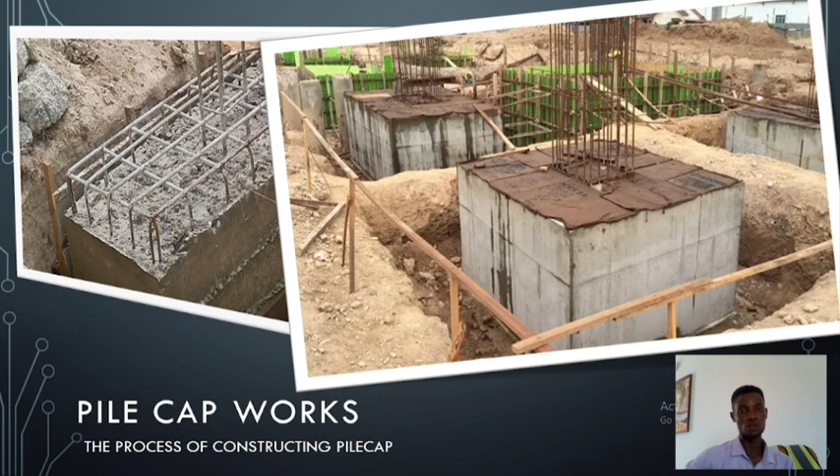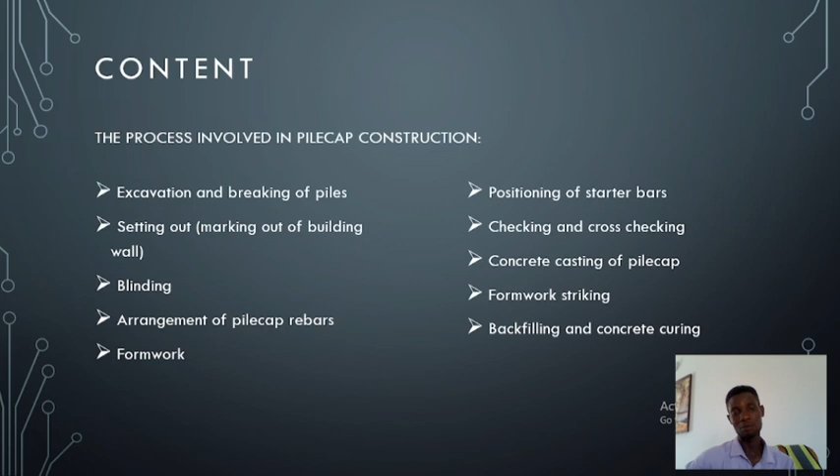So the content of this video involves excavation and breaking of pile, setting out, that is marking out of the building wall, blinding, arrangement of pile cap rebars, formwork, positioning of starter bars, checking and cross-checking, concrete casting of pile cap, formwork striking, backfilling, and concrete curing. So I'm going to take you through all this process. And these are the processes that a pile cap construction entails. So I'm going to take you through this process, and I'm going to be giving you a practical explanation on it.

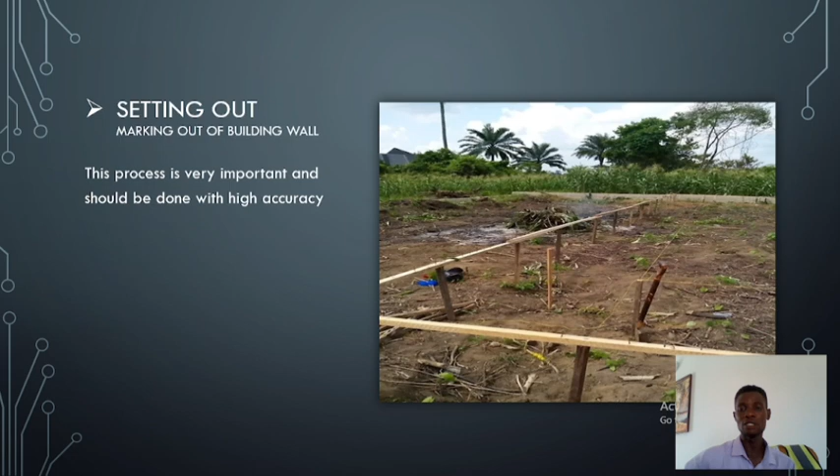So let's begin. So the first thing is the setting out, and the setting out starts after constructing the pile. So after the pile has been done, the first thing we do is the setting out. That is from the drawing, the marks are already in it, just like the normal setting out where you set out the wall of a building, where you can excavate and begin to do your blinding and your normal work. So in pile also, it involves setting out where you set out your points, know where your column starter and your wall is going to start from and where it's going to end.

So just like the drawing you are seeing here, you are going to take a look at the drawing and you offset everything on this profile board there. So that is setting out and marking out of building wall. So you mark all this out, and this is one of the crucial jobs in every construction process. Setting out is one of the first works we do after site clearing, but in this process after the pile, setting out is one of the things you also do that you don't neglect.

And if you are doing setting out, one thing you must know: if your dimension is 1550, most of the time some people will neglect the 50 behind the number. They will just take 1500. And when you have 1505, some people will neglect the 05 and use 15. Now if you are doing this, it means you are either shortening the length of the building or you are increasing the length of the building. Increasing means if you have 1505, you might say, okay, let me take 1510. No, you must be precise in your measurement if you are using the local method to do your setting out. Some people use a total station, which makes it easier for them to do setting out. So whenever you are doing setting out, make sure that you are precise with the distance.

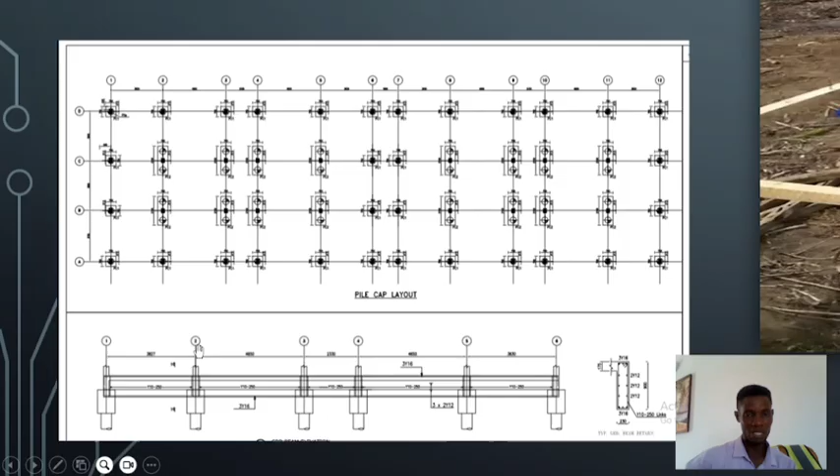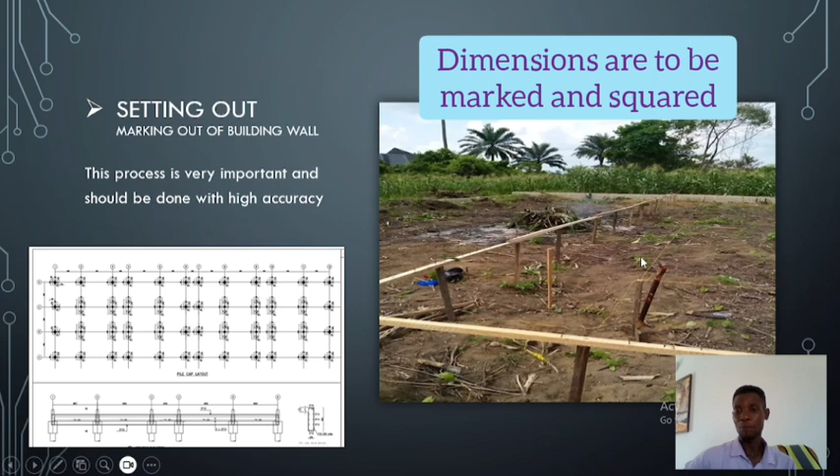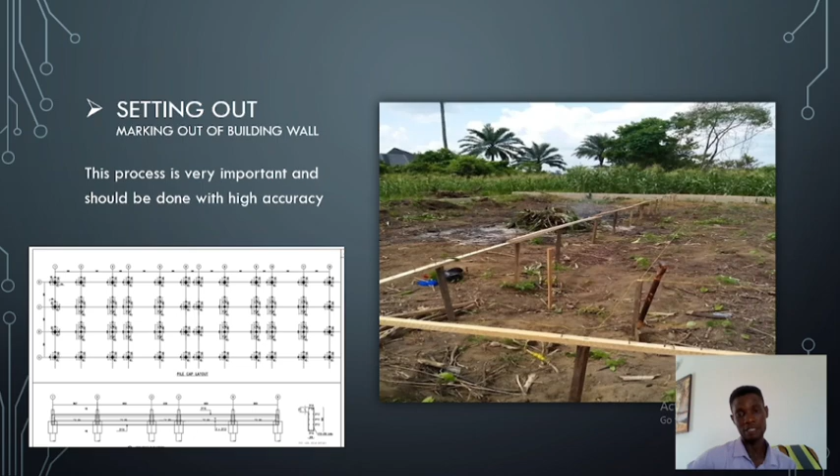Now if I zoom this down, you might not see it, but let me try doing it. Okay, there are some dimensions here, you can't see them because they are small. So you must be precise in the dimensions on the setting out. So you just mark it around. Your building wall is going to be marked out during your setting out. So that is what the setting out entails, and it is one of the jobs that you must do with cautiousness and care, not marking out the wrong point. So setting out is very crucial in every construction work, especially also in pile cap. It is very important. Now the next thing we do is the excavation.

Now, excavation involves digging the area where you need to do your pile cap. You dig to allow for blinding and your pile cap. Most of the time when we do excavation, people just excavate. You don't excavate just the size. Let me assume in your drawing you have your pile cap to be 750 by 750. Now, if you are digging, you don't dig 750. You understand? You don't dig 750.

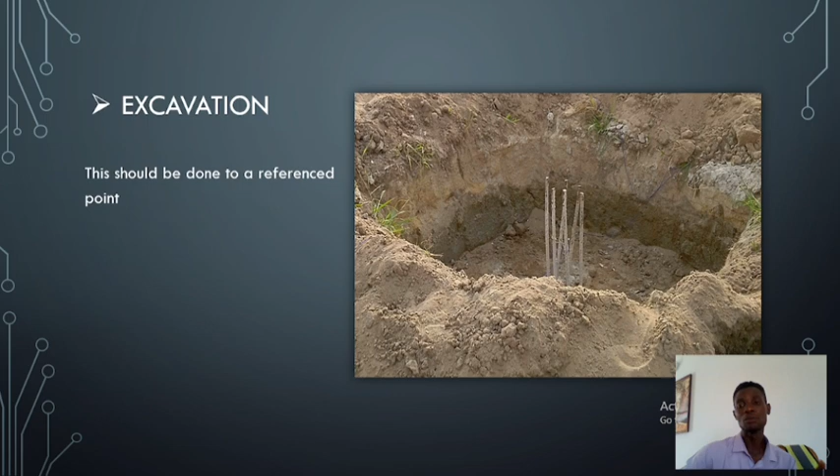You dig and leave allowance for the formwork and for the laborers or workers that are going to work around the pile cap. So you leave a space of probably 300 to 500 as allowance for them to be able to work. Look at the picture here. These are the piles. This is four piles. Now you want to do a single pile cap on this one. So there will be a space left out here, so they will be able to work on it.

In excavation, I call it excavation and breaking. If you check the content of this video, excavation and breaking. Now, how do you know what you are supposed to break in a pile cap? How do you know that you are supposed to break to a particular line? Because we don't just break. Those people that do piles will cast to the natural ground level that they met on the site. That's what they are going to do.

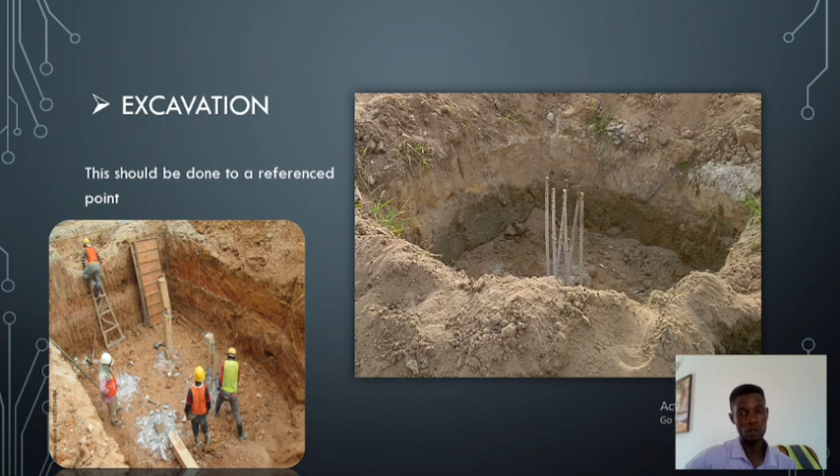They are going to cast your pile and they will take their zero level from the natural ground level, except if you have a benchmark on the site. Even if you have a benchmark, they are going to use the natural ground level as their point zero and they will cast downward. Now, when you want to do your pile cap, how do you know where to excavate to and where to break to? From this sketch, I'm going to be explaining to what depth you are going to be breaking. This is just a sketch that I just drew out now.

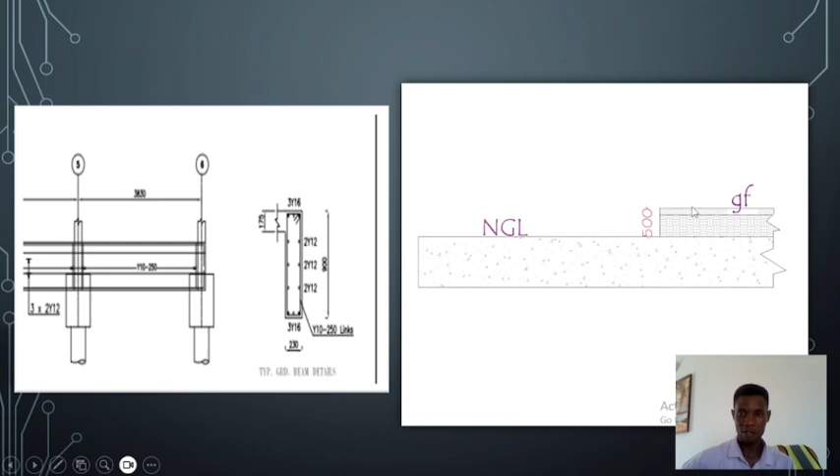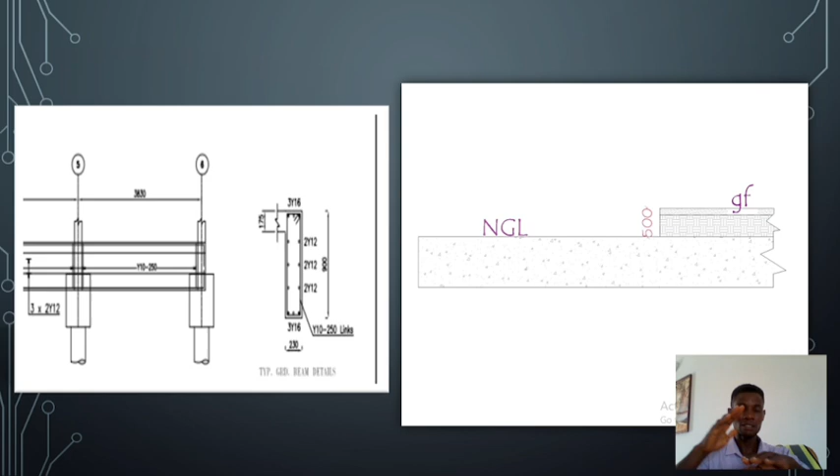From this sketch, this is the natural ground level, and GF is the ground floor. So this drawing is telling us that the ground floor, that is the DPC of the ground floor, is 500 higher than the natural ground level. Let's say you get to a site, and you are being told from the architectural drawing, because you won't get this in the structural drawing, that this is your natural ground level or your road level, and this is your building. Your building is 500 higher than the natural ground level.

Then you go to your drawing. From this drawing, my beam is 900. Let me zoom in so you can see. My beam is 900 and my pile cap, let's assume, is 1 meter. Just like the normal process, if this is 900, then the beam is going to be embedded in the pile cap by 200. So when you are casting this, you cast to the point where you leave 200 at the top, then you insert the beam at that point.

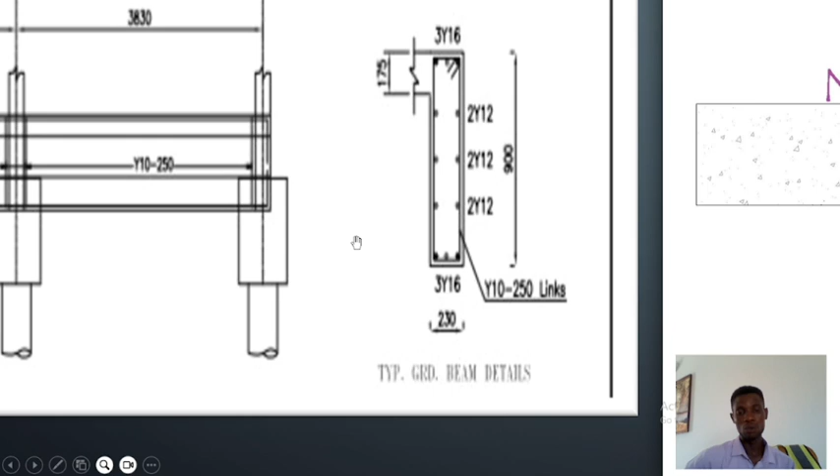So if this is 900 and I know 200 will be here, it means the remaining length here is 700, and this is 1 meter, meaning it is 1.7 from the bottom of the pile cap to the top of the beam. Yes, this is going to be the same level as that of the slab. This is the top of the pile cap. So what do I need to do from here? I want to know the depth to which I'm going to dig, and I know that from the bottom of my pile cap to the top of my beam is 1.7 from this drawing.

1.7. So what do I do? I know that this top here is going to be flush with this top here, and I have 1.7. Now 1.7 minus 500, this is the natural ground level. This is where the pile is currently.

So 1.7 minus 500, I'm going to have 1.2. It means I'm going to excavate and break for the next 1.2 meter. So I dig to that, and that will be the bottom of my pile cap and the top of my pile. If you watch this video again and repeat it, you are going to understand what I just explained. I got it from here.

This is 1.7 minus 500. This can be any dimension; I'm just using this as an instance. Now you're going to dig 1.2 meter. When you dig 1.2 meter and you construct your pile cap from 1.2, you are going to have 200 left, and you know that your beam is going to be in here by 200. Now remaining 700. Now 200 plus 700, you are going to have your value.

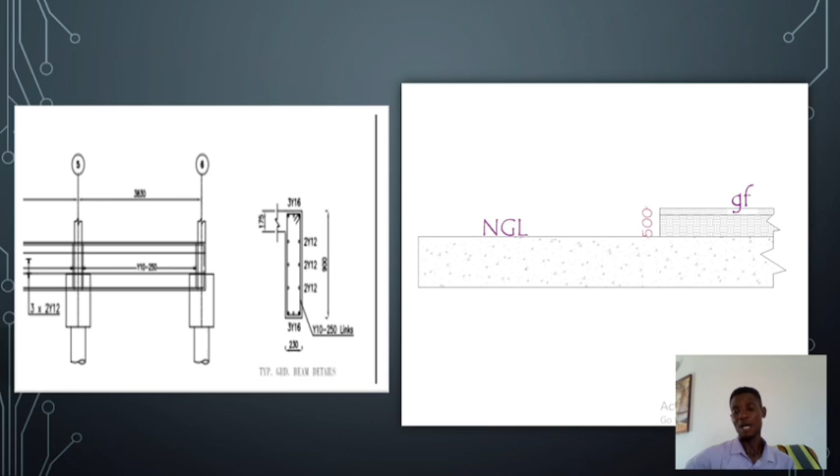So that's how to know to what depth you are going to break your pile and excavate. That's the depth you are going to excavate them. The excess reinforcement, you can just trim them off and let them remain like 500 mm upward from the pile. You are going to have your remaining iron with 500 mm. So that's how to know to what depth you are going to excavate and break.

And all these things I just explained, you are going to get the level with the leveling instrument. Probably you have a benchmark. So I just assume this is going to be the benchmark, the natural ground level. You might have any level from the architectural drawing that this is the level you must use. I'm just teaching you how to know where you are going to excavate to. So this might be 1 meter.

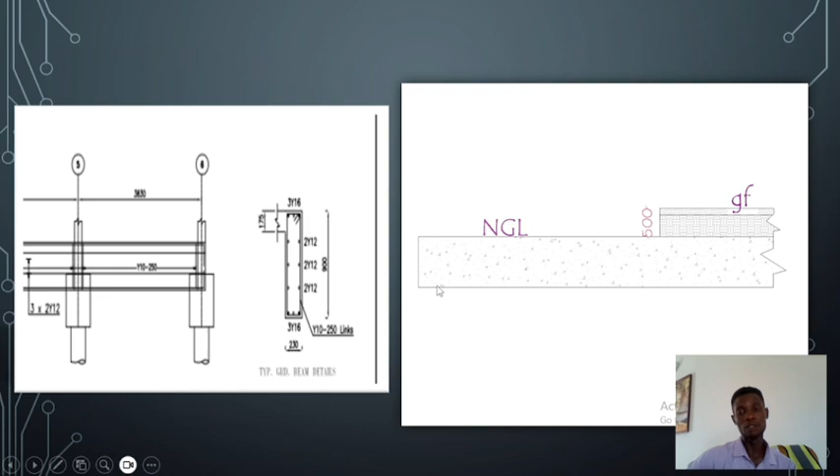You might be told that your DPC is 1 meter higher than the road level. And you know this is 1.7. So 1.7 minus 1 meter, you're going to have 700. It means you are going to just excavate for 700, do your pile cap and your beam. Then you are going to have up to 1 meter. And sometimes the reason why we bury our pile cap in the ground is to avoid it being seen after the construction. So that's the process of excavation and breaking.

So the next process is blinding after excavation. Look at this that has been excavated according to the level. So you do your blinding. Now the essence of this blinding is to prevent the reinforcement from touching the ground, from starting from the ground, because the normal way we do it, reinforcement does not touch the ground, it does not start from the ground. So you have to do your blinding where reinforcement is going to sit on.

The blinding is not a structural member that you must pay much attention to, but there must be blinding on the floor, probably 50 mm. That's the attention you must pay to it. When you are doing anything in the foundation level, your cover is always 50 mm, and the blinding is going to provide a cover to this reinforcement. So you must provide a cover of 50 mm.

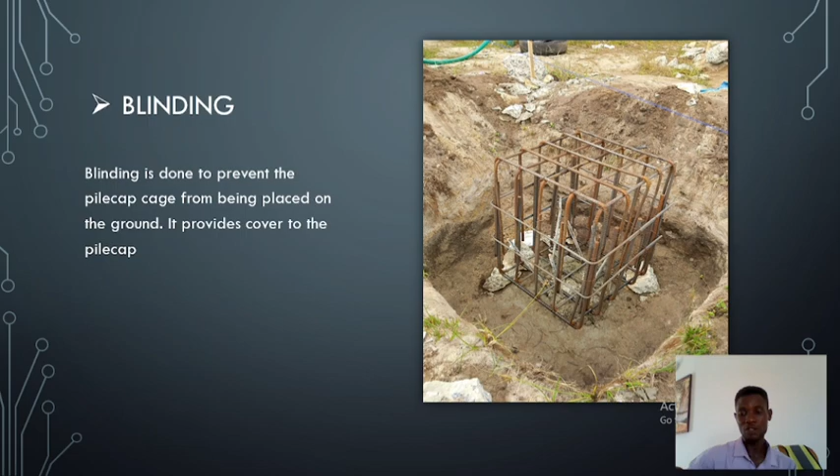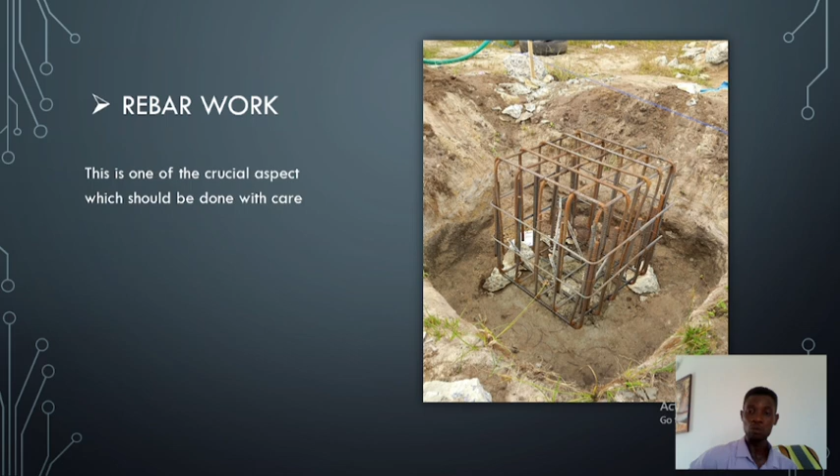That is the blinding. And the rebar work is a very crucial aspect in this job; we pay much attention to the rebar work and the casting. They are very crucial, because we are dealing with reinforced concrete. So the major element here is the rebar work and concrete. This is a crucial aspect you must pay attention to, and everything you are going to be doing will be from the structural drawing. You are going to pay much attention to the structural drawing.

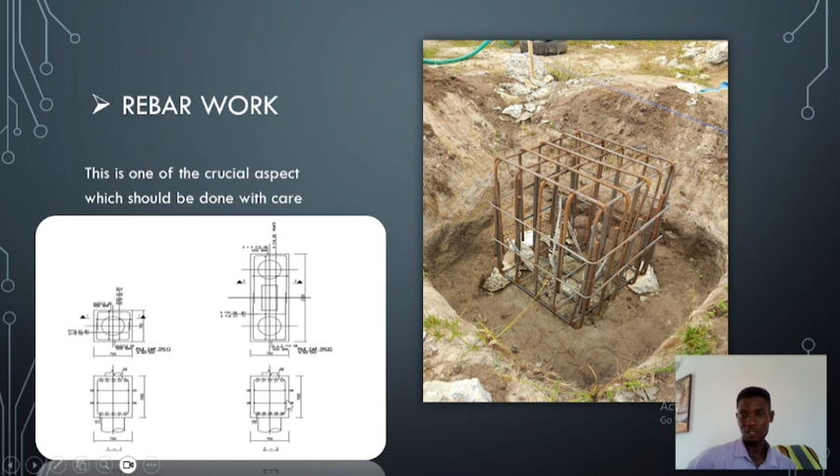Now this is the structural drawing, and this is what we have after doing this. This is the plan and this is the section. This is another plan for the bigger pile, and this is the section, and this one. So let me show you more video on it. This is when it was being constructed, and I'm going to show you how it is being constructed from the drawing and how to read the drawing,

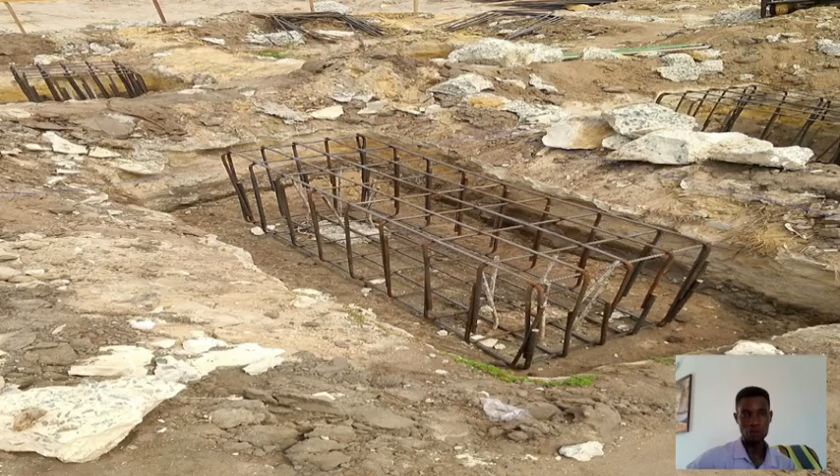the rebar drawing. And this is it when it was being formed. This is it. And let me show you how to see this drawing. This is the drawing I'll be using, because this is the one for the bigger one. Let me have it like this.

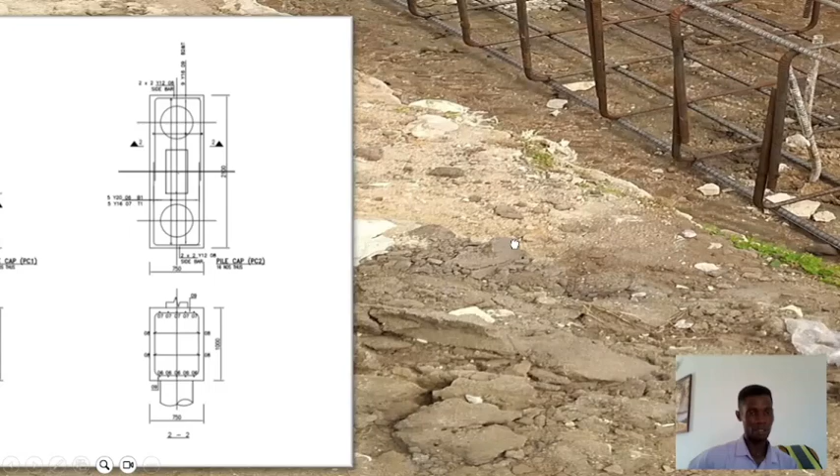Let me have it like this. Now, let's pay attention to this one. This is a section showing the depth of the pile. Now, a pile cap like that. Now, this is the depth. Now, this is the plan. The section is when you are looking from the side, and the plan is when you are looking from the top. Now, when you are looking from the top, look at what I have here.

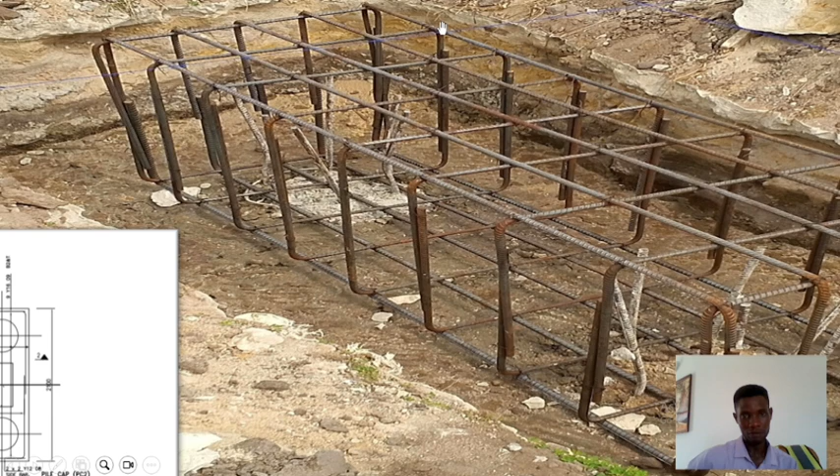I have a straight bar here. You can see it. I have a straight bar here, and I have a dot. The dot is showing me the description of this bar. Now this bar is towards the long length, right? So it's telling me that I must have 5Y20 and 5Y16 at the longer section. Now, if you look at it here, at the longer section, I have 1, 2, 3, 4, 5. Now it's at the top and it's at the bottom. Can you see it? It's at the top, because that is what the drawing tells me to do. From here, it's at the top and at the bottom.

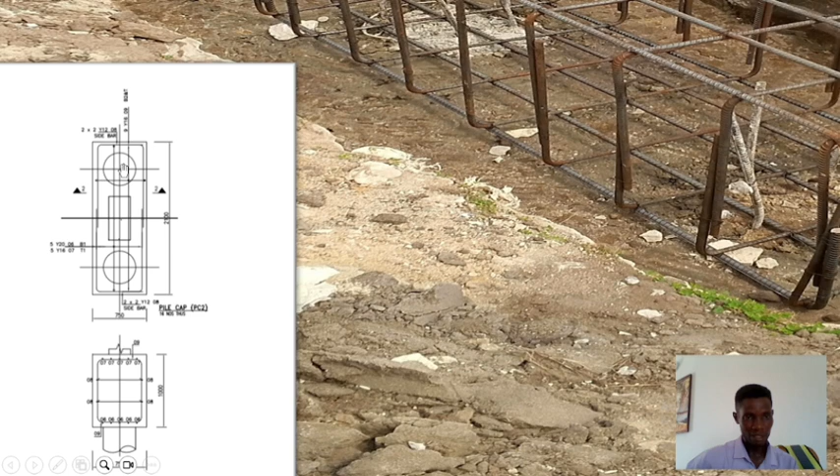Then I have another one that is distributing. They call that one B1 and T1. So I have another one that is distributing it. If you look at the drawing, you see this bar I'm touching. And the description says 9Y12 is going to cross this one I just arranged. So look at it. Well, let's count. 1, 2, 3, 4, 5, 6, 7, 8, 9. This is 9. 9Y12 is going to cross this. Look at it, it's crossing, and it has another one because it is at the bottom and at the top.

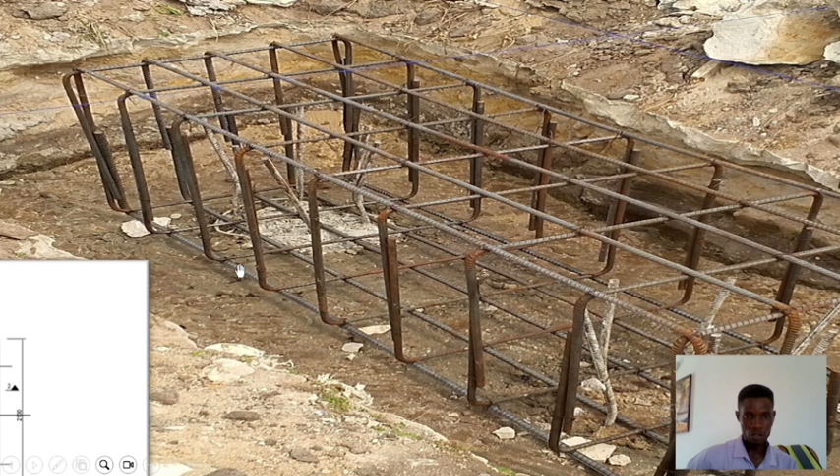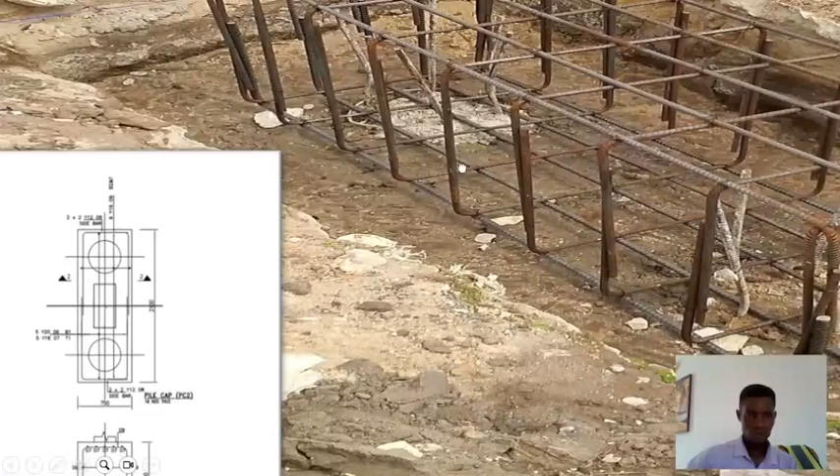These are the distribution bars and this one is the main bar. In this instance, they are the main, and these are the ones that are distributing it. You see, that's how it is being arranged. Then I have another one here, which is this U side bar. It is also called burst bar. And we have it to be 2 by 2 Y12. It is not here, it is in the next drawing after completing it. This is it. This is the burst bar.

We are saying it is a burst bar. And the function of the burst bar is to hold the two together. So in case there is excess load on this, this reinforcement will not be shifting, the cage will not burst. Now this is the pile cap reinforcement. It is arranged in form of a cage. And just like what I've said, you must pay a lot of attention to that.

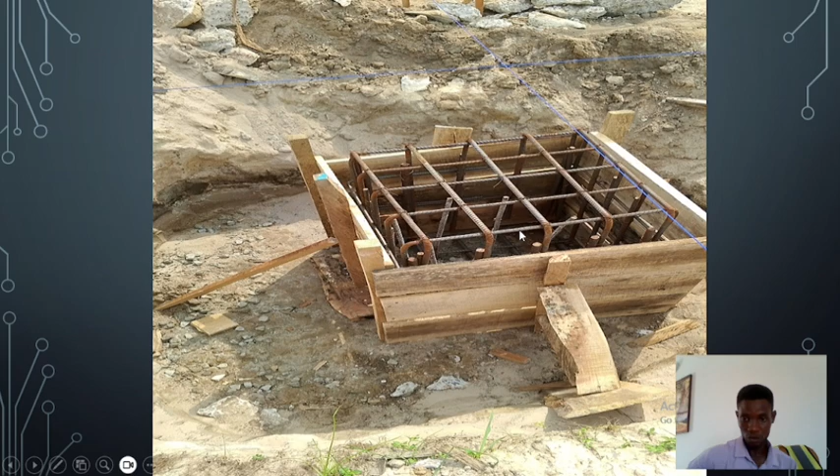Now, the next thing is the formwork. Formwork is any material that gives shape to the concrete, that you're going to have around the pile cap, to give the pile cap the shape you want to cast. So this is the complete work here. It was braced. You must make sure it is braced very well, so when you cast, it will not be shifting. The depth you are casting is about 800 mm, and the weight is very heavy and can move this wall backwards. So you brace it very well so that it will not be moving backwards. So that is the formwork.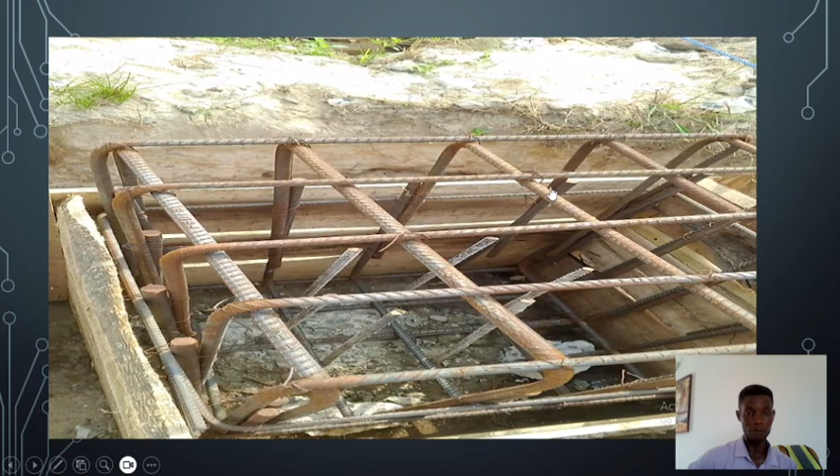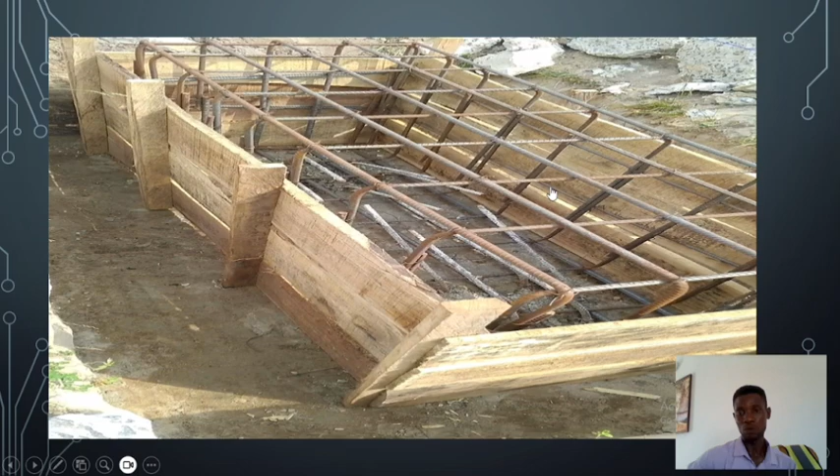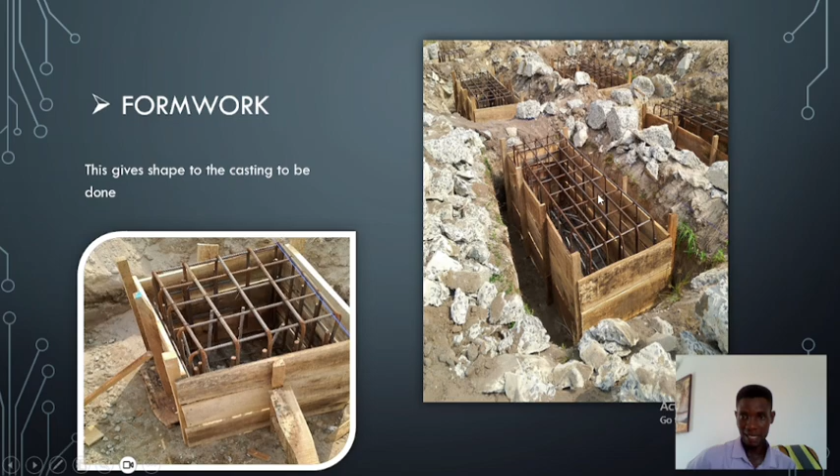The formwork, you can look at it from this video. So after arranging the reinforcement, the formwork. You see, while we are doing everything, the lines are still there. We didn't move the lines from the second stage. We did that so you're going to know where to place your pile cap and everything. You see the line is still there. So you make sure it is at the center line. Although some piles are going to shift.

So the next stage is positioning of your starter bar after your formwork. This is one of the crucial jobs in pile cap casting. So before you cast a pile cap, you must introduce the starter bar.

The starter bar is the bar for the column that you are going to lap the column reinforcement to. You must know the adequate length to cut, because if you cut the wrong length, it's going to be a problem after casting the beam, because it's going to be short at the top. So let me read this note here.

The length of the starter bar is determined from the drawing with the condition on site. Just like I said, the condition on site, if the site is asking you to go to a benchmark and you have a benchmark on site that you need to meet up with, and the condition from the drawing. So the length of the bar is given as the bend. This bend is always 300, 200, depending on the person that is doing it.

Let's say 300 plus the depth of the pile cap. It's starting from the bottom of the pile cap. This starter bar is starting from the bottom of the pile cap. So you have a bend which is 300 plus the depth of the pile cap, in this case 1 meter, plus depth of beam, in this case 900 minus 200, that is 700. So you have 300, 1 meter, 700, plus the lap length after the slab.

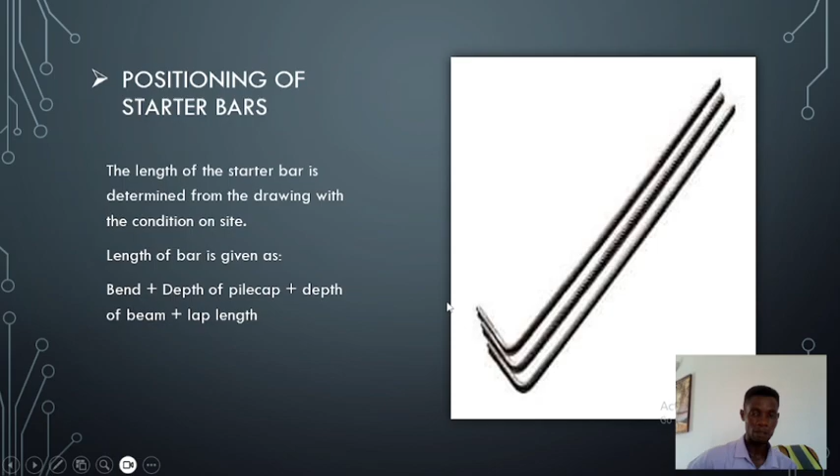That is how to do it. Now look at the starter bars. From mere looking at it, anybody that just comes here and looks at it would think this is too long. You understand? But we are doing the work, we know it is not too long. And if you can see, there is still a line there.

It is a line we use in positioning it. So you are going to use the line to position it. This is the center line. We pick it from the center line from the setting out. So this is the center line. We make sure it passes through the center of this pile.

And how do you know it passes through the center? This is from your drawing. You are going to know if it passed through the center. Now looking at this, this is the pile.

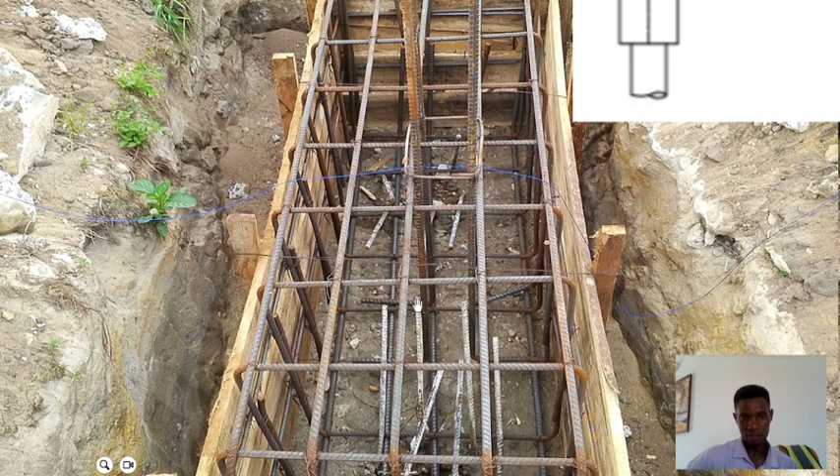This is the pile, so this is the placement. Just like I said, it's going to be 300 if you look at it now. Let me zoom in. If you are seeing the bend, look at the bend. This is 300, plus depth of this, 1 meter. So let's say 1 meter, we get to this top, plus the beam 700. We are going to have the remaining 1 meter.

So that's how to do the setting out. It is one crucial job that you must pay attention to.

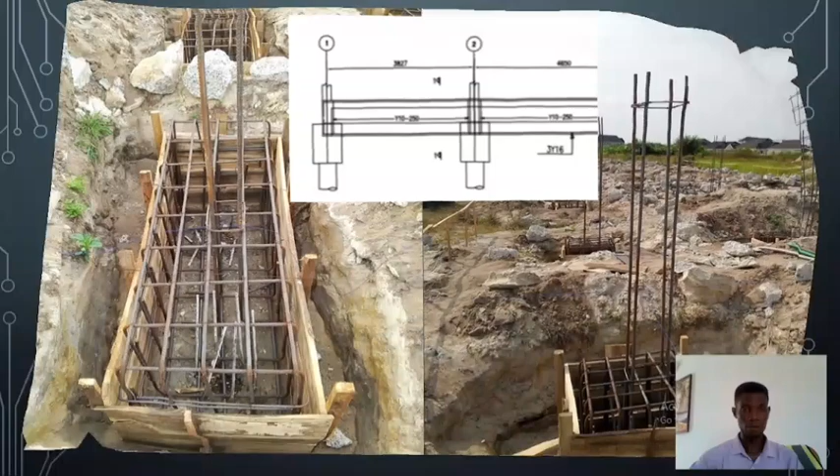So after that, the next thing is checking and verification, or checking and cross-checking. The reason why you check is to ensure there is no error in the work you have done. When you are doing that and you are uncertain whether what you are doing is wrong, always try to call your superior to come and check what you have done.

So the lap length must be observed. The type of reinforcement specified must be observed. The strength, the tensile strength of the reinforcement must be observed before you cast, because after casting you are going to embed all this in the casting. After casting, if you realize you have made a mistake, those mistakes, before you can recover them, it means you need to break the casting.

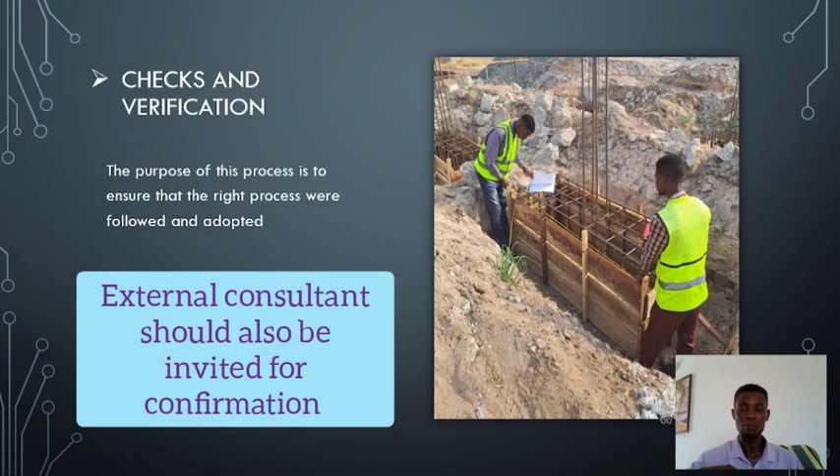Breaking the casting after you've used some amount of cement will not be economical. So you do checks to make sure everything is right: the positioning of the starter bar according to the drawing, the arrangement of your reinforcement, the size of your pile cap according to the drawing, and every other check you need to do. Then after that, you can now go to the next step, which is casting of the pile cap.

While doing this, you must ensure the mix from the drawing is being observed, the appropriate mix. Most of the time when we cast pile caps, the grade is always 25 newtons per millimeter square. That is the grade after 28 days. It's going to be 25 because it is foundation work.

Remember the Bible verse that says, if the foundation could be destroyed, what would the righteous do? So whenever you are doing work on the foundation, it is time to pay crucial attention, not a time to compromise. Because if you compromise, it is not really work. They say what is worth doing is worth doing well. If you think it is worth building a house, a 5-story building, then do it well, because if you don't, everything will crumble and turn to rubble, and that is a waste of a lot of money. Reinforcement in the market now is very expensive, even cement and every construction material is very expensive now. So it is time to pay crucial attention to whatsoever you are doing.

So I was talking about the mixing. You must make sure that the mixing is according to what you have in your drawing. You must not compromise in the mixing. The note I have is: ensure the right mixing proportion is used and that it's well vibrated.

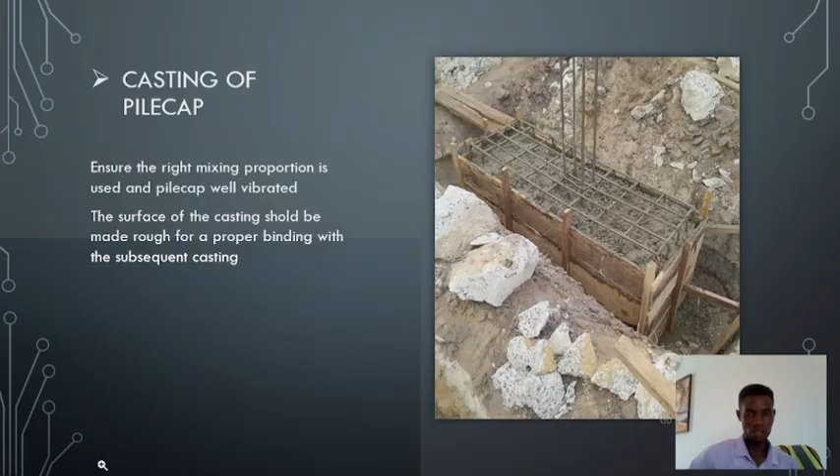The surface of the casting should be made rough for proper binding with the subsequent casting. You can see the surface is not smooth, it's not the kind of work that needs a bricklayer. It's left rough because your beam is going to anchor here, so you must leave this place open, and when you do your beam, you put a board around it and cast it.

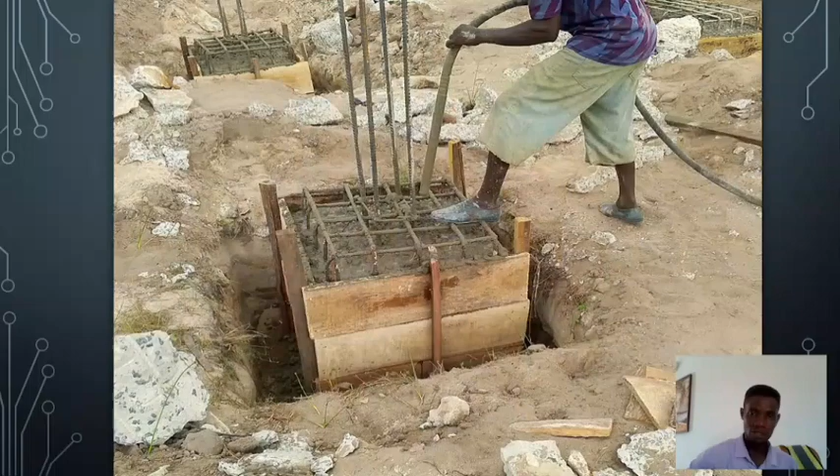So for the next casting to bind with this successfully, this area must be rough, and your casting should be well vibrated. Look at it, this is after the casting, this is the process of vibration. It must be well vibrated.

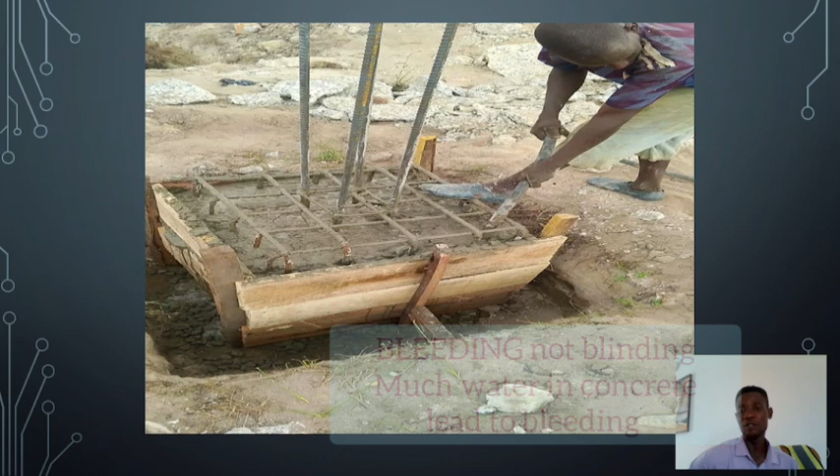Let me share a brief note on water content. Sometimes we have a water content of 0.3 or 0.35 in concrete, sometimes 0.45 and 0.55. The more water you use, the weaker the concrete, and sometimes if the water is more, it's going to cause bleeding. And if the water is too small, the workability is reduced.

One of the water percentages I advise people to use is 0.45. You can see during the process of vibrating that it's not that watery, look at the side of the formwork, it's not that watery. So the water content we use is 0.45.

Convert from kg to liter. Density is mass over volume. Now you have the mass and you are looking for the volume. Density of water is 1000 kilogram per meter cube. That is going to be what you have from 0.45 multiplied by 50, divided by 1000.

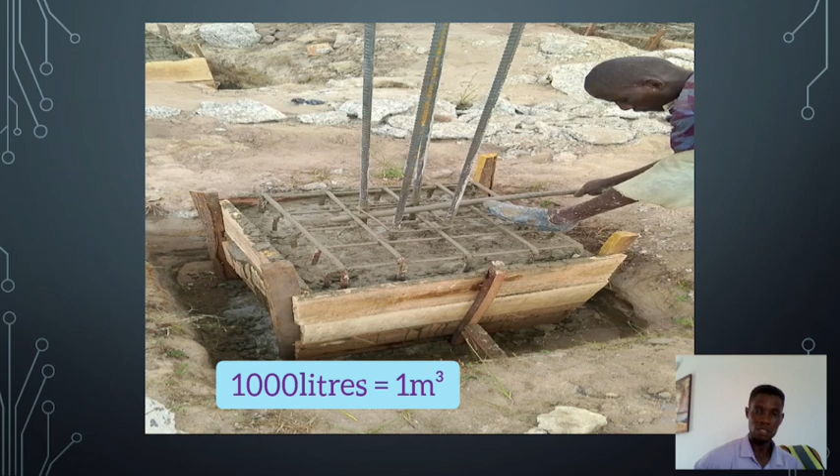Then you are going to have the water content in volume, and you can also convert from volume to liters. That is 1000 liter is one meter cube. Maybe I'm going to do this in another video for better understanding. So I'm just trying to say the water content should be 0.45 times the weight of the cement you are using per mix. That's how to get the water content.

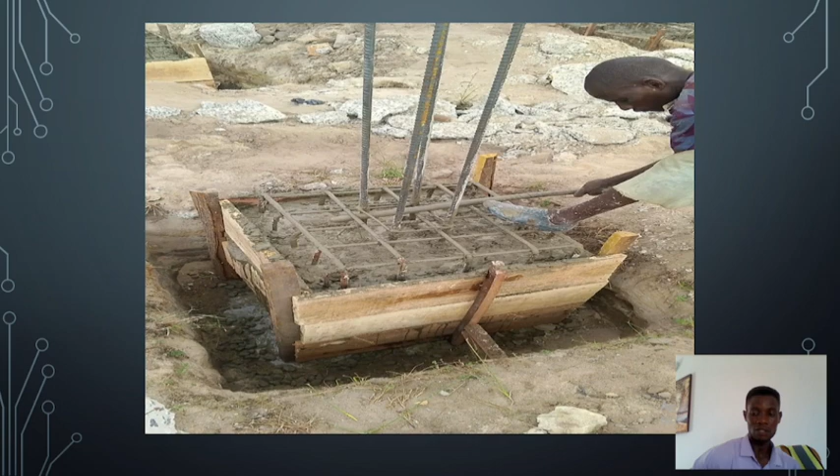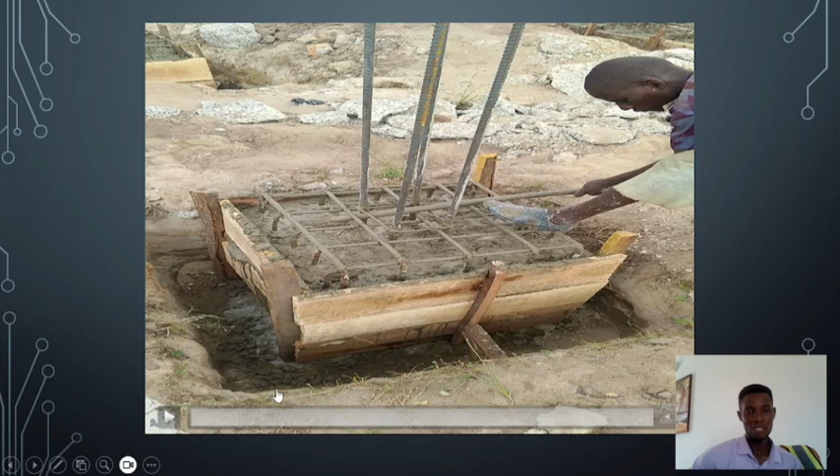Look at this now, the water content is not much. We haven't been seeing water here during vibration, but because the water content is minimal, we don't have our cement being washed away in the water. We don't have bleeding. So that's that about that.

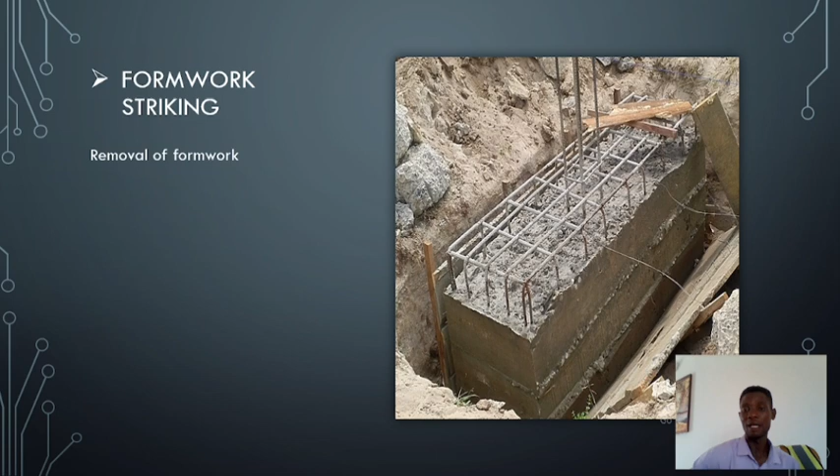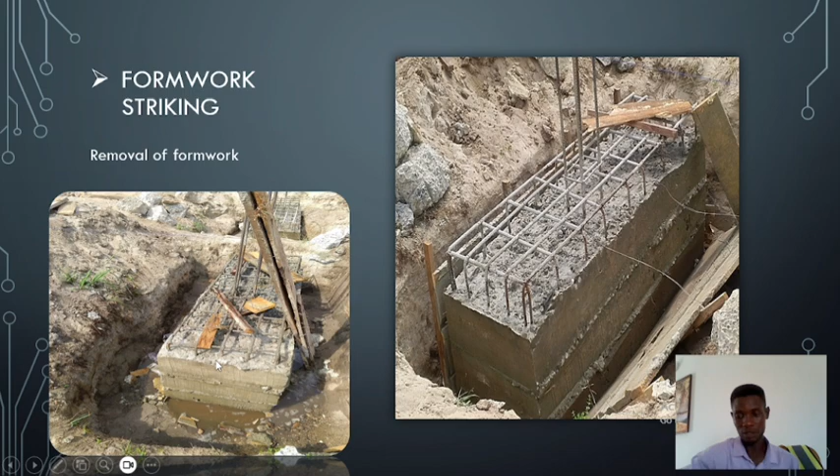Then the next stage is formwork striking. You remove the formwork after 24 hours, or after 12 hours you can remove the formwork and backfill. Look at it, even before removing some of the formwork, you've already been curing. You can see it already curing. So after removing the formwork, the next stage is backfilling.

I see backfilling as one form of curing. We do curing to make sure that the water content in the concrete does not dry too fast, just like the kind of weather we have in Africa, which is very sunny. That's one of the reasons why we must take curing very seriously, because when the water in the concrete dries too fast, it can lead to cracks in the concrete and thereby reduce its strength.

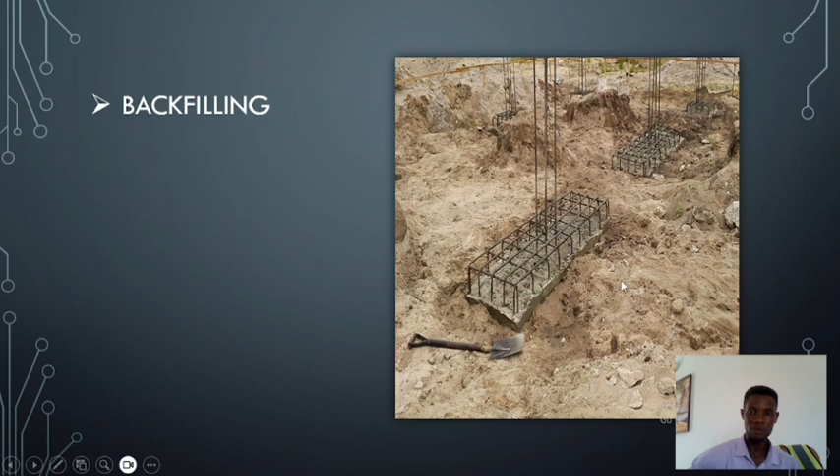When you don't allow it to dry quickly by curing, then you are going to have a concrete with the required strength. So the next day, we just backfill. You backfill around it, and the backfill is going to prevent it from drying quickly. Then you can go ahead with your curing.

Now this is the process where it is being backfilled. After that you do your curing, you can say it has been backfilled. So this area will be protected and the water will not dry fast. Then we still pour more on it to keep it wet.

Keep it wet. In a normal condition, we cure for 28 days. The curing of concrete is for 28 days, and we take the cube to the lab. We do a cube and take it to the lab, cure for 7 days and some for 28 days. It is normal that concrete will get 70% of its strength in 7 days.

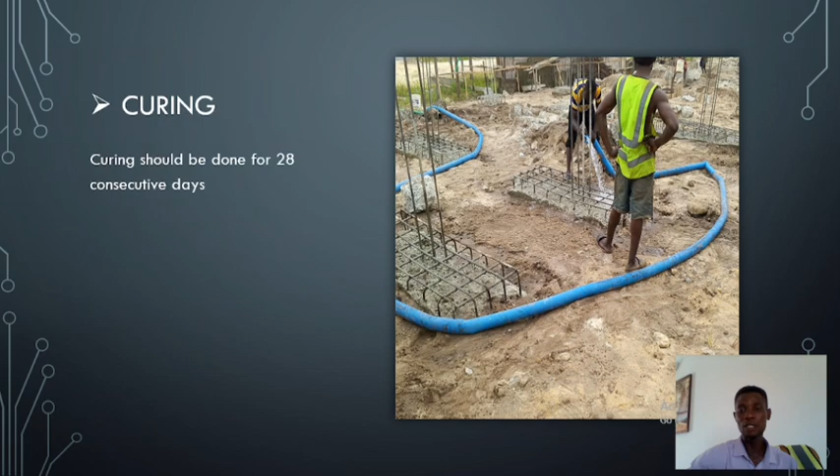So you must take it to the lab and make sure you have 70% of the strength you casted, then cure it. This is the last stage of the pilecap work, the process where you cure, but that doesn't mean you should not continue with the subsequent work. You still continue with the subsequent work you have to do, but you must keep curing the concrete. Another place where we cure, you must keep curing.

Now another thing is preparation of cubes for testing. Just like I mentioned, you cure for 28 days, and you test, some people test for 7 days, 14 days, 21 and 28. But normally what most people do is for the first 7 days and the first 28 days, you prepare your cube and take it to the lab to check, to make sure that the design strength is what you have.

What people do in advanced countries is they do the cube test and take it to the lab, testing before knowing what to do on site. This is what I'm trying to explain. Let's say in your design, your design passed with grade 25 concrete, that is, the mix ratio of 25 made your design pass. Before doing that, probably you are in a new environment, you need to get the sharp sand, you need to get the granite, and mix it at a proportion you think will give you the grade of 25.

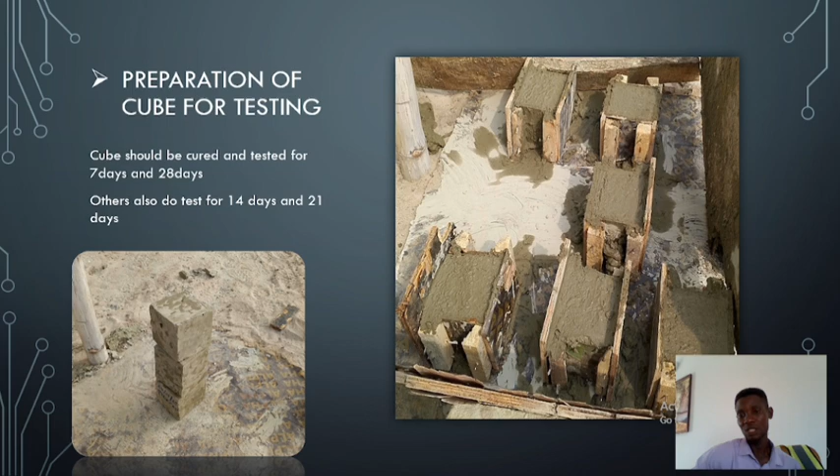Let's say in this instance, 1.5, 3. After 7 days, you take it to the lab. After 28 days, you take it to the lab, and you have grade 25. That is when you can come to the site and use that same sharp sand and that same granite to do the work. But what we do in this part of the world, we cast, and after the casting, that is when we take part of it, cure for 7 days and 28 days, then take it to the lab for testing, which is okay.

So in summary, always ensure the right processes are followed in order to get the best result. Also note that the tensile strength of the rebar should be checked to ascertain if the rod meets required design specification. Strength of rod used is always 410 newton per millimeter square or 460 newton per millimeter square.

Now, what I'm trying to say is the rod we use in construction, we test for it. When you are doing any work, I can say 1 story, 2 story, remember that what you are doing involves life and money, so you need to take the necessary steps. In most of the designs we have, the strength of the reinforcement is 410 or 460.

So what I'm trying to say is you should make sure that your reinforcement meets the required strength. If you are to construct with a 410 newton per millimeter reinforcement, and the reinforcement you bought, because you didn't test it, is around 350, without being told, you are jeopardizing the safety of the structure already. So you must test for reinforcement, which is what I just explained in this first one.